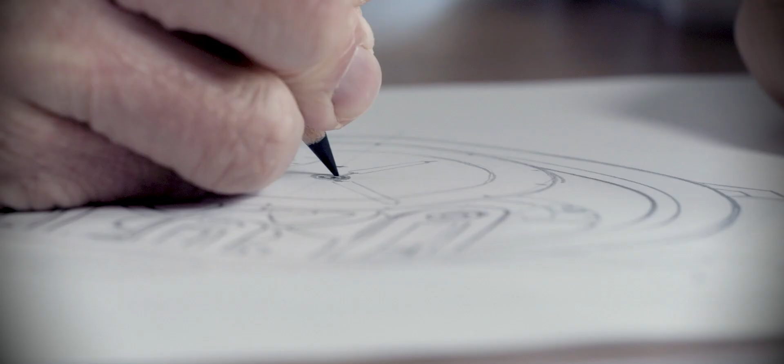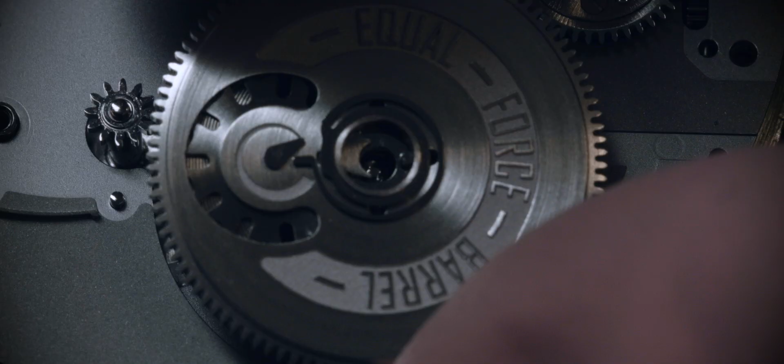Armin Strom is doing great things. In 2016 they reinvented the resonance, and this year, to celebrate the 10th anniversary, they introduced the minute repeater resonance. As a cherry on the cake, they're launching a new entry-level collection called System 78.

The first timepiece in this collection is called Gravity Equal Force, and it's a really interesting watch. Besides the looks that remind us of old pocket watches, there's a Declutch stopwork and a motor barrel. All of this to ensure a very stable flow of energy going from the mainspring barrel to the escapement. We're talking to Claude Greisler, who will explain to us how the Gravity Equal Force works.

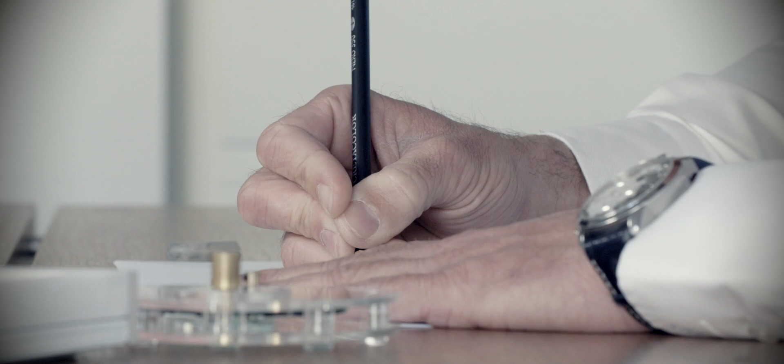Gravity Equal Force is the first watch out of a new collection, a collection called System 78. Ten years of experience in building watches, and the fact that we could reinvent resonance, was inspiring us for System 78. We definitely want to add innovative watchmaking into our collection.

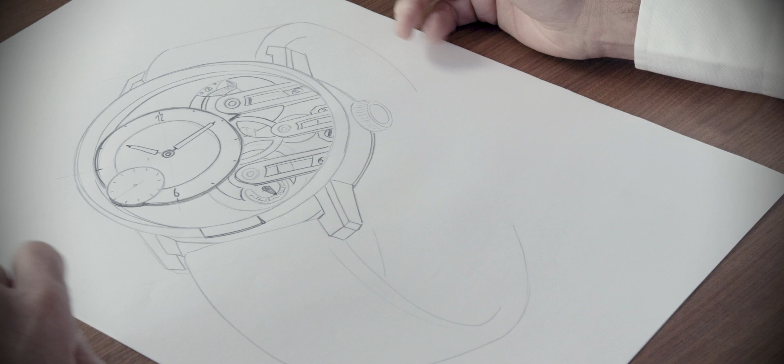The Gravity Equal Force is, first of all, a downsizing of the collection. Instead of the 43.6, we are going down to a 41mm case. The bezel and the lugs are reduced to give a much lighter design to the case. Another design feature is the off-center dial.

The previous collection was based on an open-work dial. The new collection is based on an off-center dial, which gives a time reading inside of the watch. The movement is still very visible from the dial side. So we have the micro rotor visible, we have the barrel visible, and the whole winding system.

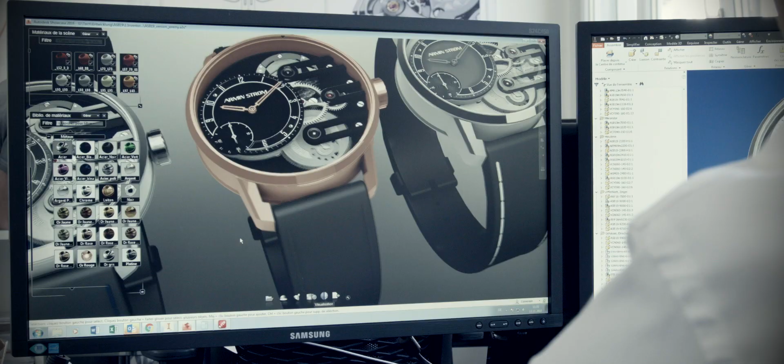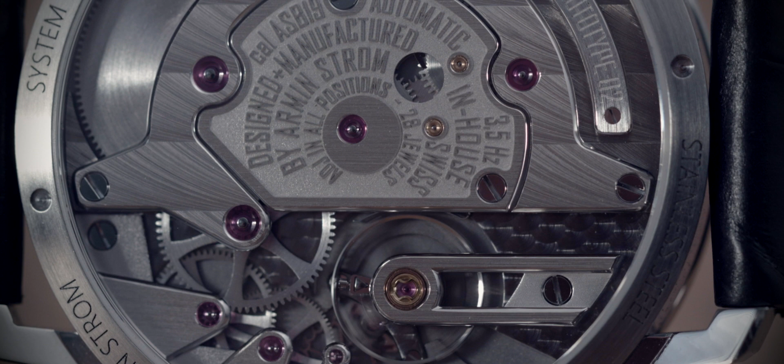So the problem we have in our going barrels is we have a low energy at the beginning for the first two windings. Then we have an optimum range for the mid windings, and we have too much energy at the end once the barrel is fully wound. And the goal of the Declutch stopwork is just to use the best working section for the gear train, which then goes to the regulator system.

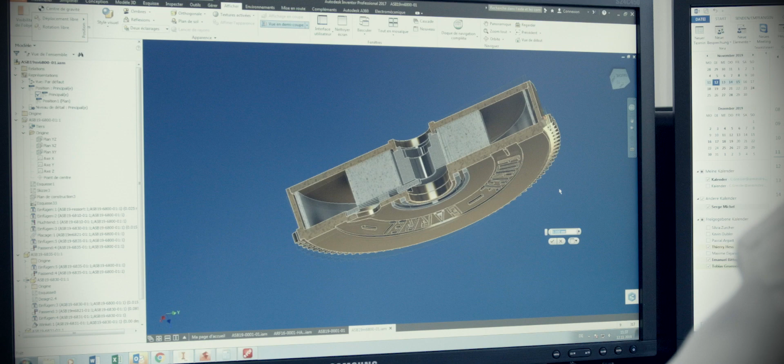The Declutch stopwork has two functions. We prevent the barrel from completely unwinding, and we guarantee the slip of the automatic mainspring. The advantage is that we have a much more stable torque going to the escapement and the regulation system, the balance wheel.

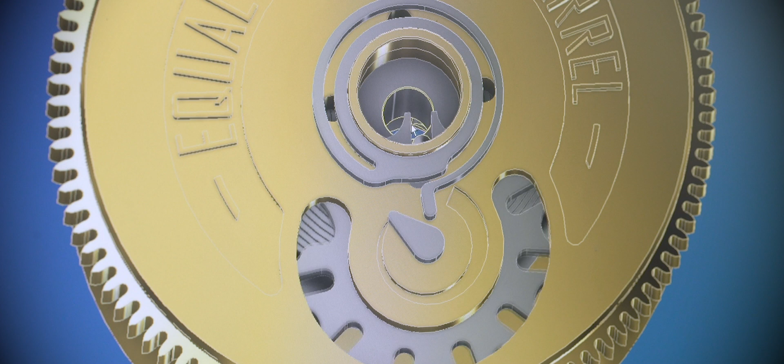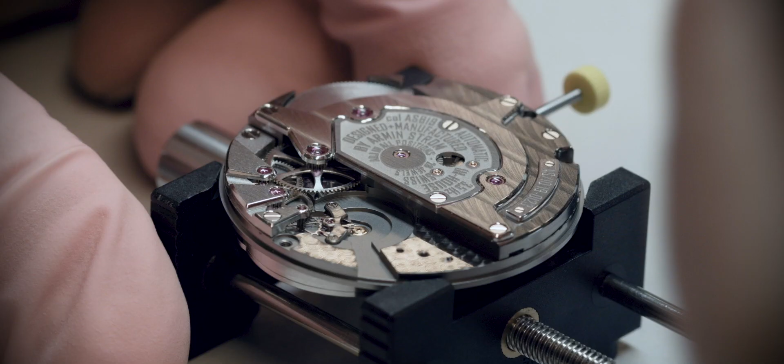Stopwork functions, also known as Maltese cross or Geneva cross, were mainly made on hand-winding watches to prevent the lower section of the mainspring and the higher section of the mainspring. We all know this technique comes from pocket watches, so it's been known for a few hundred years to use this particular function to avoid those problems in a mechanical watch. The invention and the new thing about our Declutch stopwork is that we guarantee the slip function of the automatic mainspring.

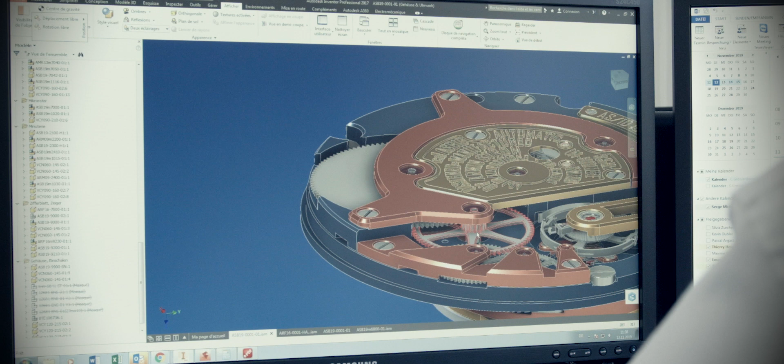The motor barrel construction is an inverse construction. Instead of having the arbor, which is the center part of the barrel, winding up the mainspring, and then the barrel giving the energy to the gear train, we have an opposite construction. We have inversed the construction of the barrel. So we wind the outside of the barrel to wind up the mainspring, and we have the arbor, the central part, which has the most precise guiding, giving the energy to the gear train.

After 10 years of experience in doing gear trains, in milling our own teeth, in setting our own watches, we could improve by taking the measurements over the last 10 years to improve the shape of the teeth and the distance between the wheels, to really have a much more consistent, a much more equal force going to the regulation system.

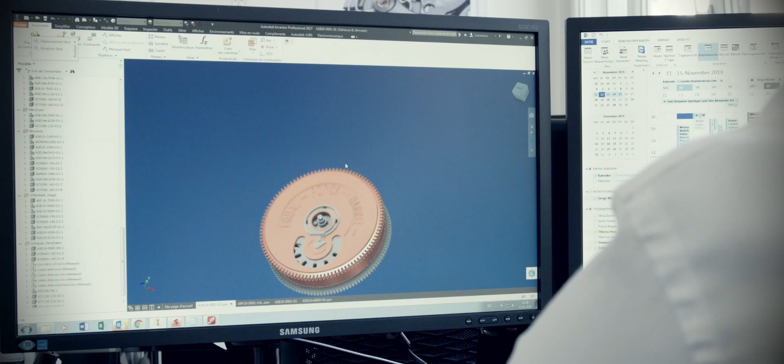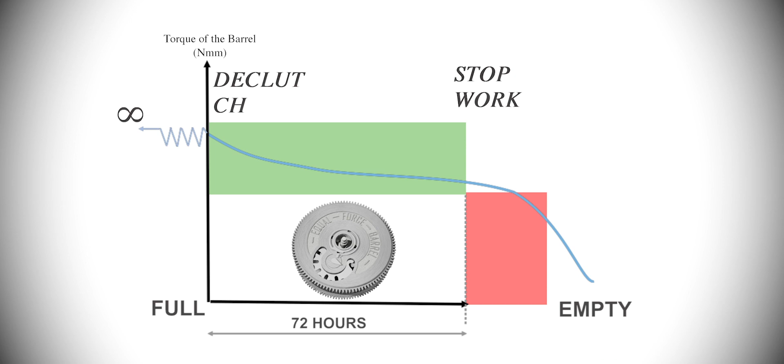Thanks to the redesign and the optimized development we have done on the barrel, we can guarantee a perfect power range for 72 hours. And we have added, design-wise, a power reserve indication which is visible on the top of the barrel, which is a very cool feature on this watch.

System 78 is a new platform for innovative watchmaking. There are more exciting watches coming in this collection.